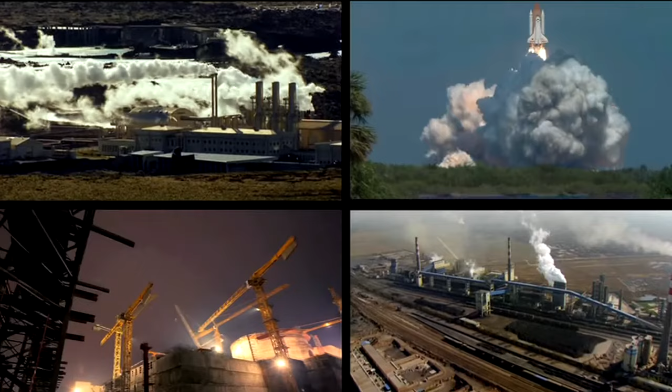We are living in the era of great changes. The power of the human mind has made our life more comfortable, shortened distances, and opened up new horizons. But for the global industry, our era is the time of great challenges.

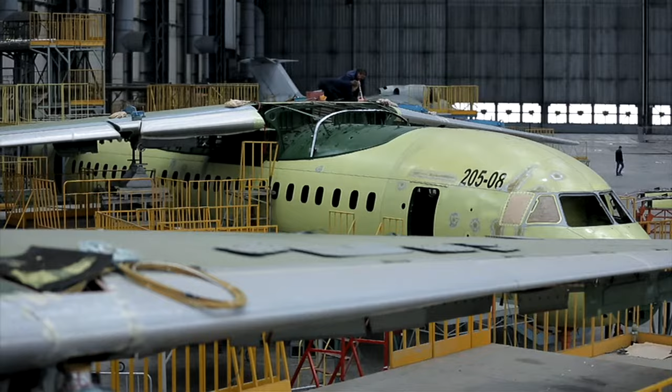The airplane is the fastest and most expensive means of transport. Since the advent of the first aircraft, designers have been working to reduce its weight and make it more reliable, and so reduce the cost of each kilogram carried by air.

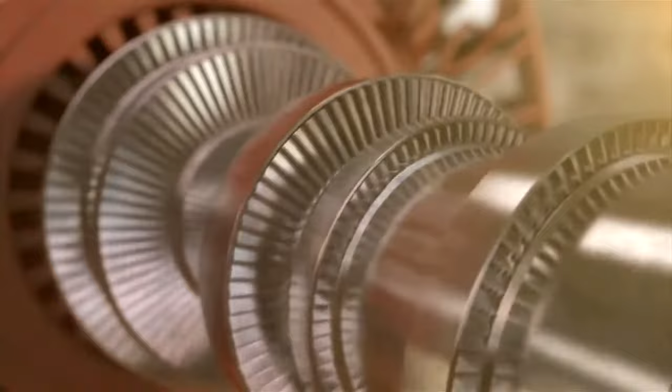Nuclear power is the most promising and cheapest way of generating electric power. However, each structural element of a nuclear reactor operates under conditions of overload and ultra-high temperatures. Extension of their service life and enhancement of their reliability and safety are the main tasks for engineers.

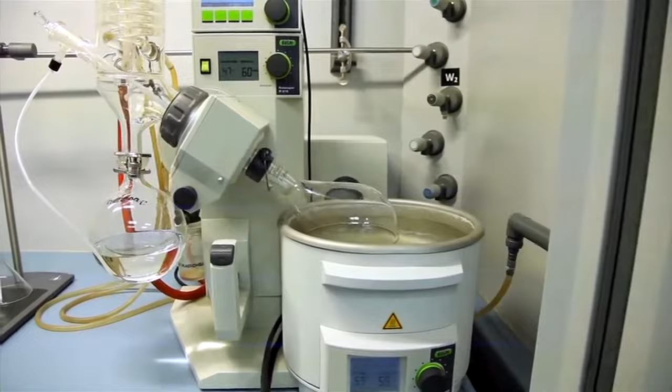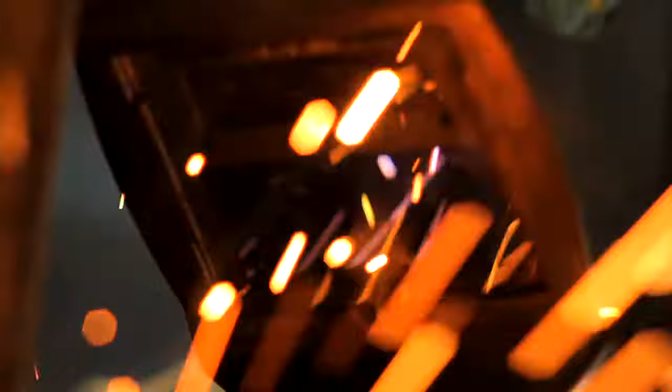Thus, technical progress is impossible without new materials and their new unique properties: ultra-lightness, ultra-strength, and heat resistance. However, the introduction of new materials requires new progressive techniques of their connection. For over 70 years, this field of research has been developed here at the B.E.Paton Research Institute of Electric Welding.

The institute was founded in 1934. It employs 3,500 staff. The B.E.Paton Institute has sold more than 150 licenses to the United States, Germany, Japan, Russia, Sweden, France, China, and other countries worldwide.

Structurally, the institute comprises an experimental design and engineering bureau, pilot production facilities, 3 pilot plants, and more than a dozen engineering centers.

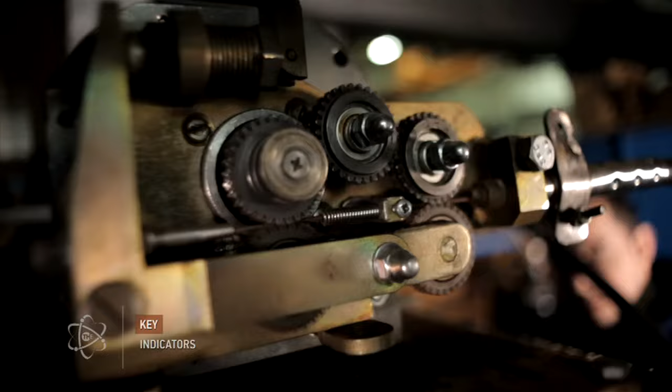The technologies developed by the B.E.Paton Institute have served as prerequisites for successful implementation of many audacious global projects, such as forced gasification across the USSR, the world's most powerful weapon, the Satan ballistic missile, continuous welded rail tracks allowing trains to move at 500 km per hour, semi-automatic underwater welding, and welding in the outer space.

Notably, the B.E.Paton Institute was one of the originators of electron-beam welding, the technology without which nuclear power engineering and modern aircraft, rocket, and engine building industries would be impossible.

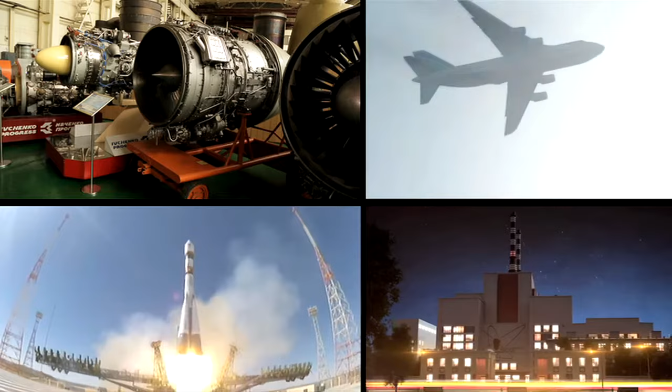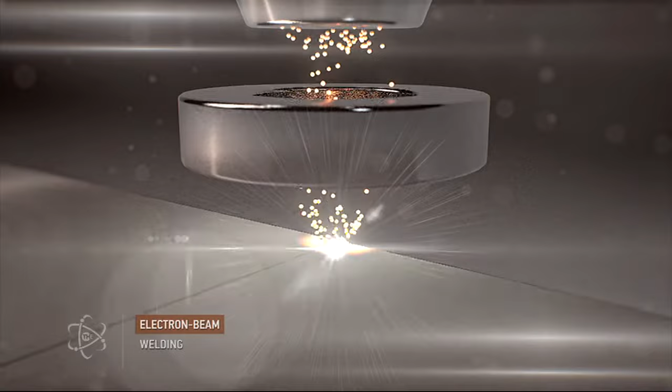How does it work? Electrons are focused into a tight beam and accelerated to ultra-high speeds. When they hit the surface, their kinetic energy is converted into heat, and so metal is heated to high temperatures. As a result, the weld is characterized by large depth and small width.

Electron-beam welding ensures reliable connection of refractory, chemically active, and dissimilar steels, as well as high-strength aluminum and titanium-based alloys. Unlike arc welding, this method reduces energy consumption by 10 to 15 times, and the fusion area by 25 times.

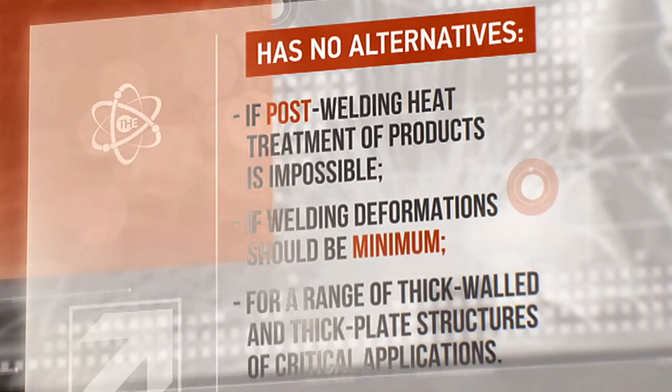Electron-beam welding has no alternative if post-welding heat treatment of products is impossible, if welding deformations should be minimal, and for a range of thick-walled and thick-plate structures of critical applications. Making the most of its powerful scientific potential, the B.E.Paton Institute develops unique technologies with due regard for individual customers' requirements. Here are just a few examples.

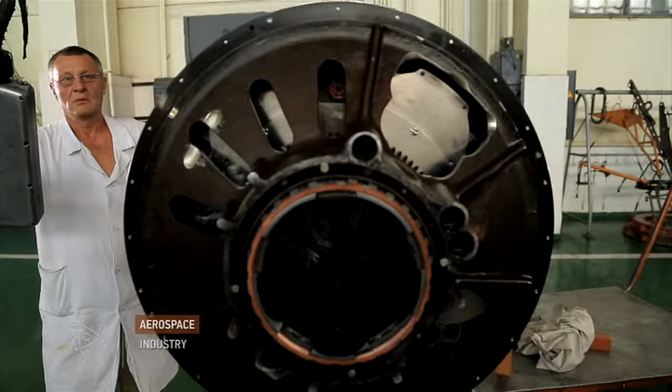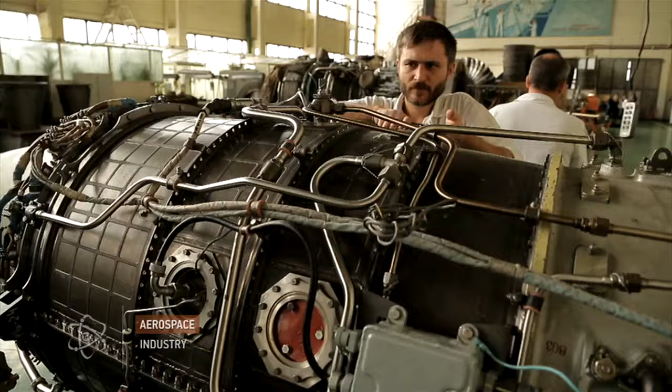The engine is the heart of an aircraft. The manufacturers that offer more economical and more powerful engines win the market. The hotter the gas fed to the turbine, the better these parameters. For this reason, joint connections have to withstand extremely high temperatures.

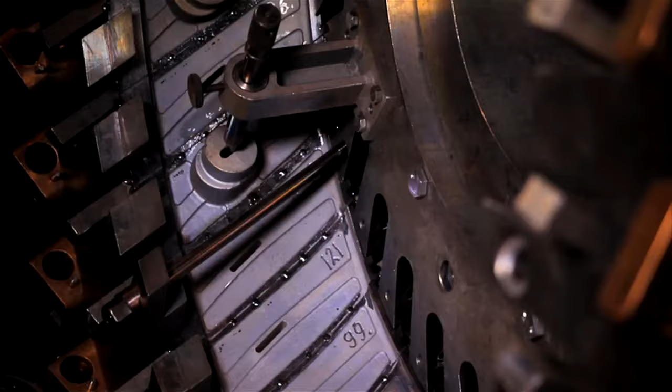In 2014, B.E.Paton scientists developed a method to weld the outer part of the casing of the aircraft engine's front intermediate pressure compressor. The customer was Motor Sich, one of the world's leading engine manufacturers. The material was VT5L titanium alloy. Previously, the unit had a cast design, which resulted in high production costs and unstable quality.

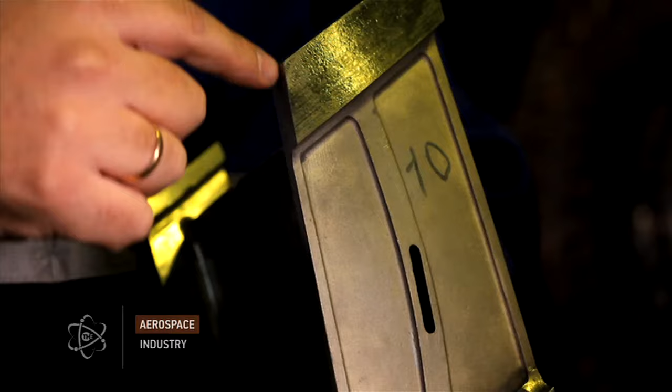The developers faced 2 problems while making the welded structure. First, geometrically, the joint was a variable cross-section. Second, the through penetration weld had to be 5 to 25 mm thick and made in one run. Scientists of the B.E.Paton Institute found effective solutions to both problems.

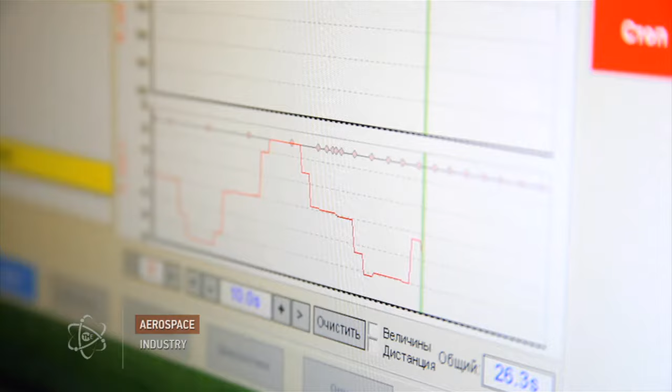The process is entirely controlled by special software, and the welding program excludes an operator. The strength factor of joints conforms to the strength factor of the metal body.

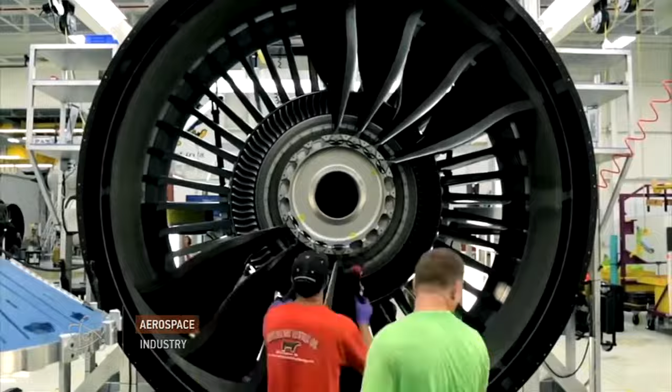The main part of an aircraft engine turbine, the rotating blade, bears the brunt of the heat. The engine's operation fully depends on its strength. And this is about flight safety.

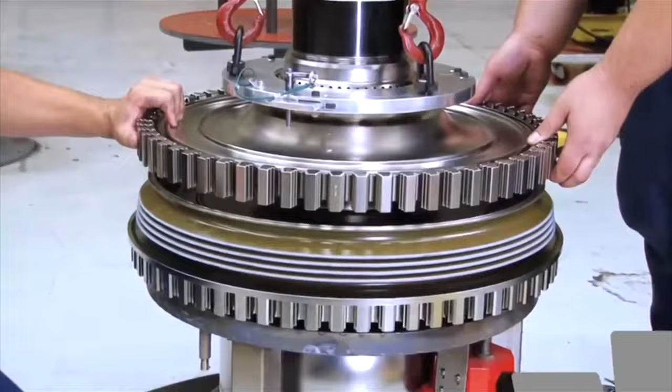The B.E.Paton Institute has developed a method to restore damaged blades by welding in triangular inserts. The customer was Motor Sich, and the material was VT titanium alloy. One rotating blade costs tens of thousands of euros, and an engine has a multitude of them.

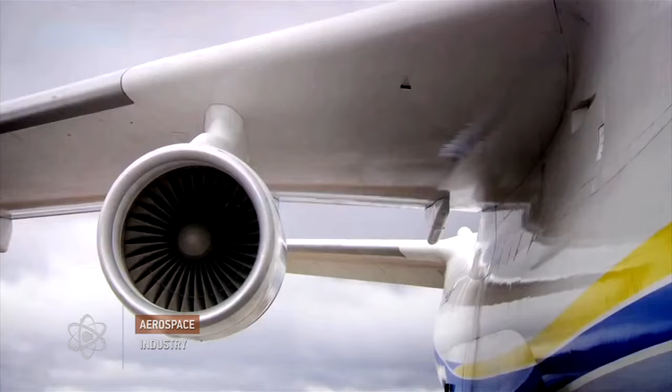Our technology provides for the service life extension of this part by several times. The economic effect is obvious. Currently, a pilot batch of restored blades is undergoing strength tests. After their completion, the method will be applied at the customer's production facilities.

We have developed an electron-beam welding method for high-pressure spherical balloons of spacecraft. The customer is the Space Agency of the Republic of India, and the material is VT6 titanium alloy.

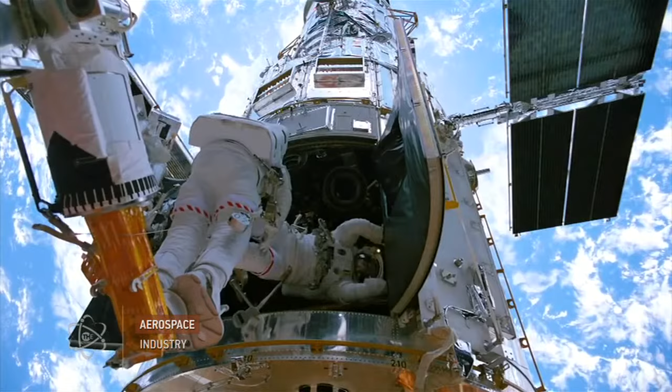As compared with argon arc welding, this method minimizes welding deformations, post-welding mechanical treatment, and weld spatter inside a spherical balloon. Experts believe that the future of the aerospace industry belongs to magnesium alloys, one of the lightest and at the same time one of the most durable types of materials.

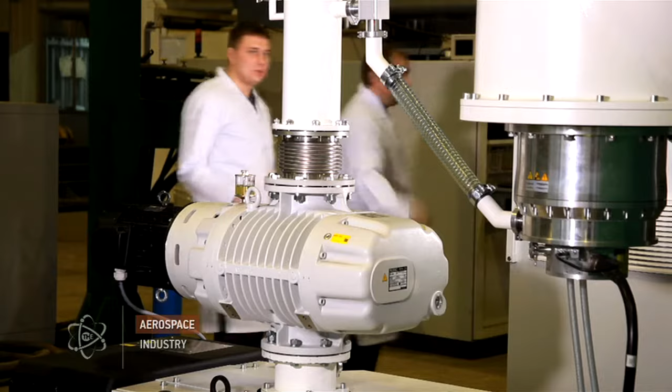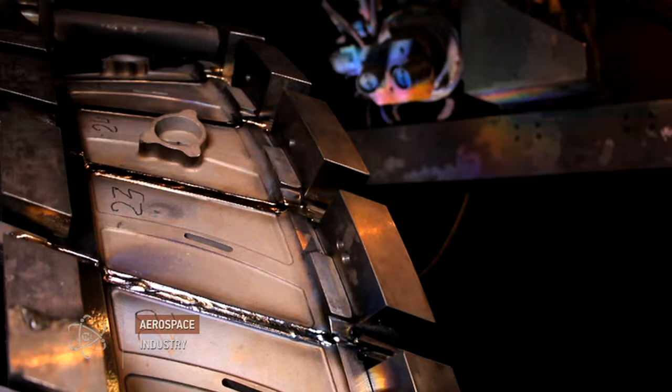However, the introduction of magnesium alloys on a large scale has so far been hindered by imperfect connection techniques. The B.E. Paton Institute has developed a hybrid technique for connecting this material. The first stage is friction welding, and the next stage is electron-beam welding. Thanks to pre-treatment of welded edges by friction stir, cracks and other defects are avoided, and welded joints become almost twice as strong, with their plasticity and impact resistance enhanced as well. This technology has been developed for rehabilitation of intermediate casings of aircraft engines by welding in a 6 mm thick rectangular insert in the damaged area.

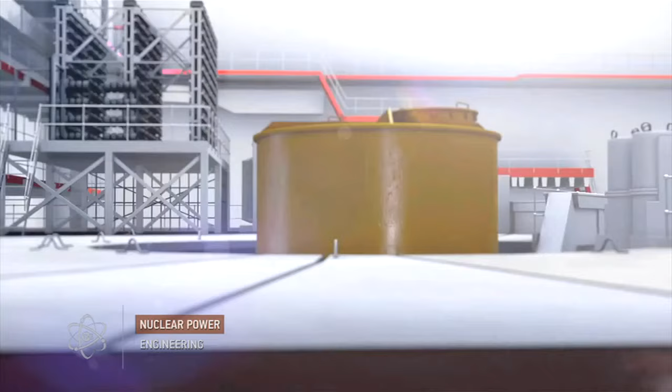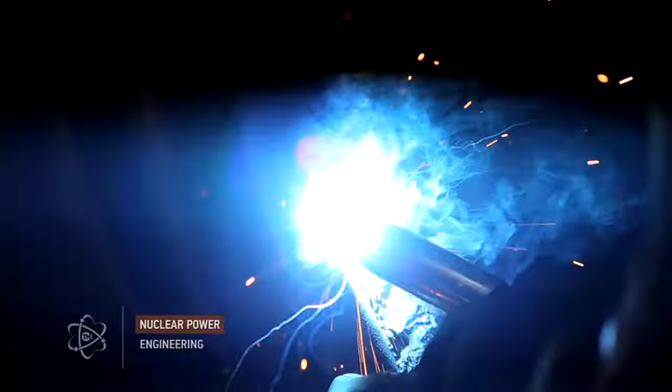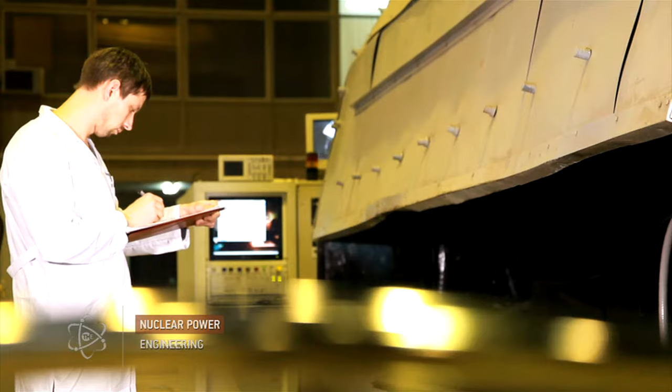One of the most challenging aspects of the global energy industry is reliable connection of thick-walled structures like walls of a nuclear reactor. At present, walls thicker than 40 mm are connected by a multi-layer weld, which sometimes takes up to 100 runs. This technique requires multi-step preparation and significantly increases the likelihood of weld defects, which subsequently affects quality and performance. The B.E. Paton Institute has developed a new technique to solve this problem.

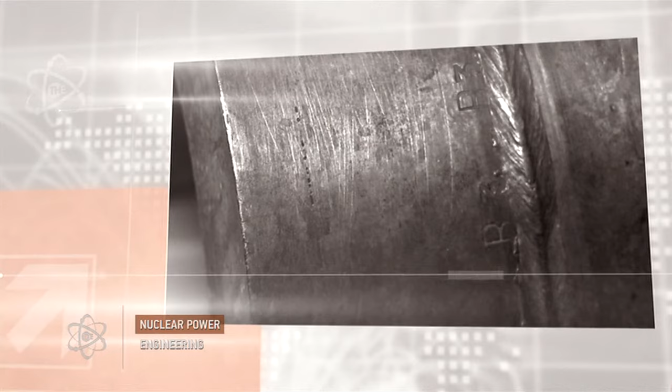The customer is the Russian public holding company Izhorsky Zavody, the only CIS manufacturer of equipment for reactors of the so-termed nuclear island, as well as for reactors of the petrochemical industry. The material is chrome molybdenum steels. Owing to 90 kilowatt beam power, materials up to 200 mm thick can be welded together in one run. This is a unique achievement, yet unsurpassed by any manufacturer of welding equipment. Comprehensive studies have confirmed that the weld is as strong as the metal body.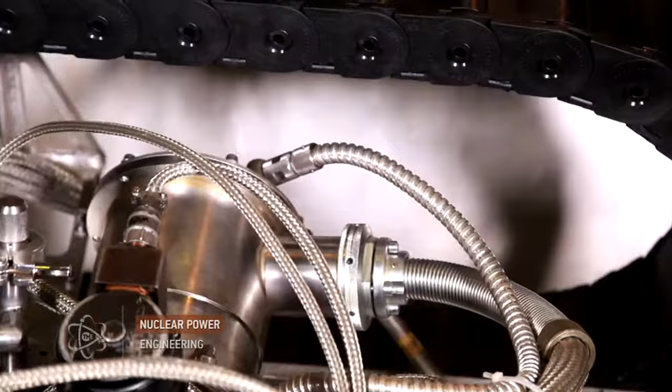Using this method, the customer is able to skip several preparatory stages and cut the time of welding by several times, thus significantly improving weld joint quality and increasing productivity.

A heat exchange unit is the key element of a nuclear reactor. Because of colossal pressure in the tubes reaching 10 megapascals, water does not boil at 270 degrees centigrade. High radiation adds to the most extreme wear conditions.

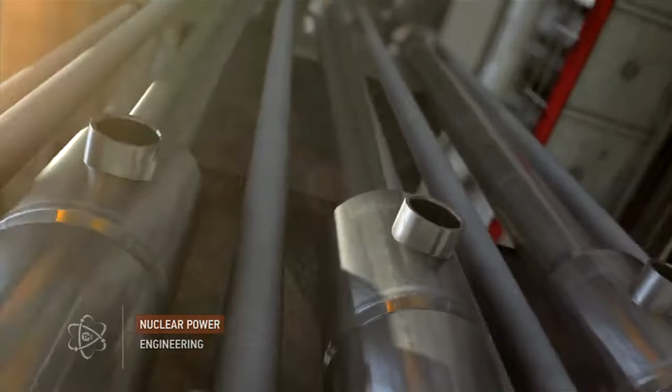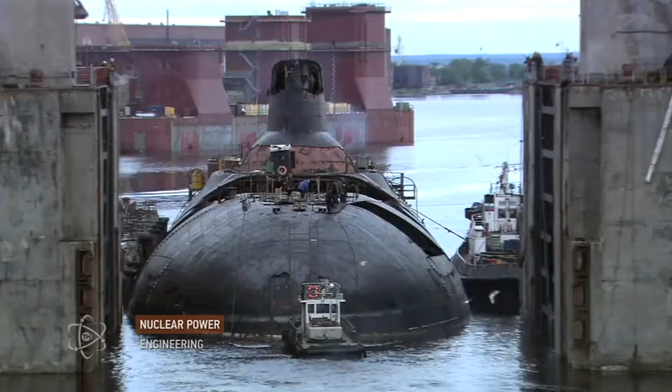The B.E. Paton Institute has developed an electron-beam welding method to connect the heat exchanger walls with multiple tubes. Unlike traditional argon arc welding, this method doubles the penetration depth and the unit's service life. The welding proceeds automatically according to a preset program. This method has been successfully applied in the construction of nuclear-powered vessels.

The energy crisis forces humankind to search for and develop new oil and gas fields, and here the main task for engineers is to extend the service life of drill bits. They consist of 3 vertical case segments made from medium alloy high-strength steel.

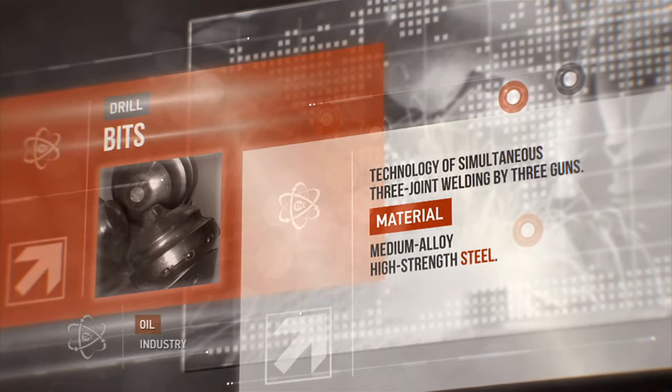The traditional method of successive welds did not allow for the regular geometric shape of the drilling bit. As a result, its service life and performance characteristics reduced. The B.E. Paton Institute has developed a method of simultaneous 3-joint welding by 3 guns. As a result, output capacity has increased to 5 items per hour.

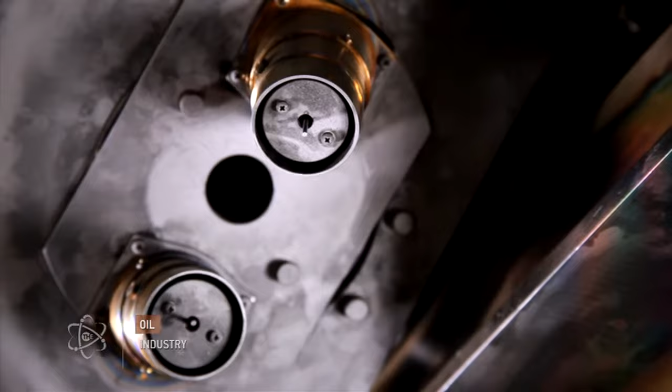Using this method, the customers have not only increased their outputs by several times, but have also increased considerably the end product's economic efficiency. This technology has been successfully applied at Chinese factories for more than 5 years, allowing them to put out products with higher added value.

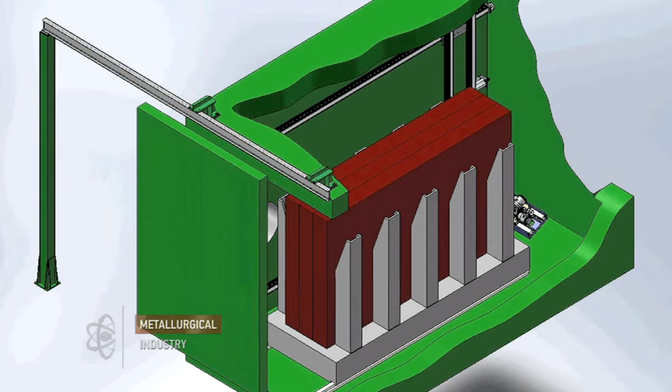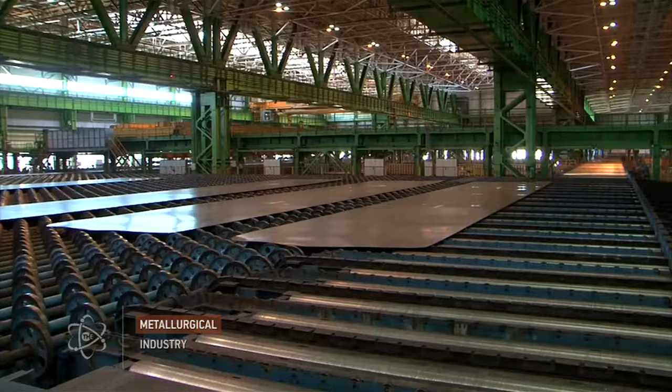Scientists of the B.E. Paton Institute have developed a slab connection method for the metallurgical industry. The customers, a pool of integrated iron and steel works in China, needed to increase the thickness of their slabs from 20 to 40 millimeters. However, they were limited by the rolling mill's capacity. Traditional welding methods did not allow them to obtain homogeneous material because of cavities with air forming inside.

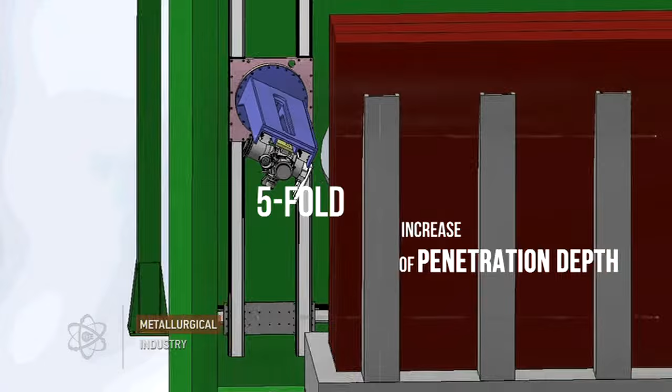Electron-beam welding takes place in vacuum. At the same time, penetration is 5 times deeper than in arc welding. This ensures homogeneity of metal during subsequent rolling and the output capacity of 1 item per hour.

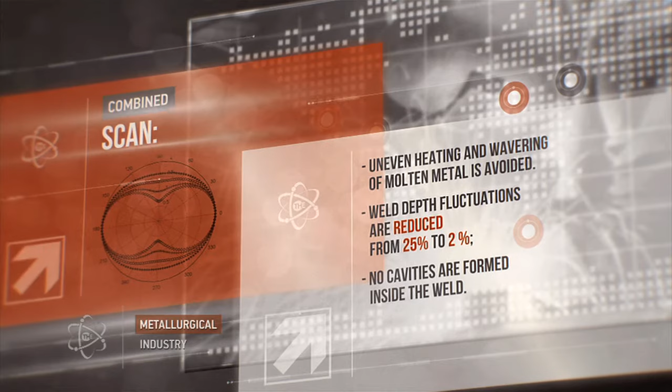The B.E. Paton Institute successfully applies combined electron beam scanning, wave, circular, etc. This helps to avoid uneven heating and ripple of molten metal. As a result, weld depth fluctuations are reduced from 25% to 2%, and welds have no cavities.

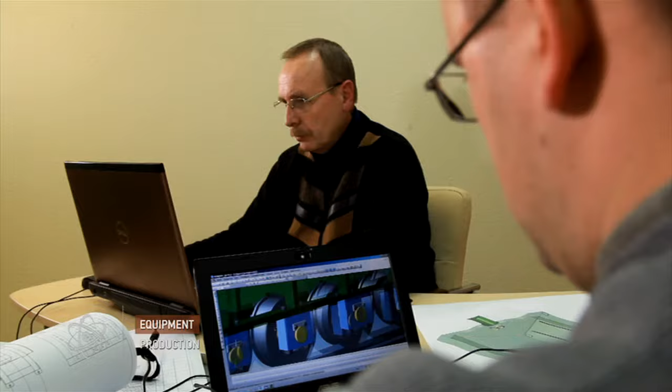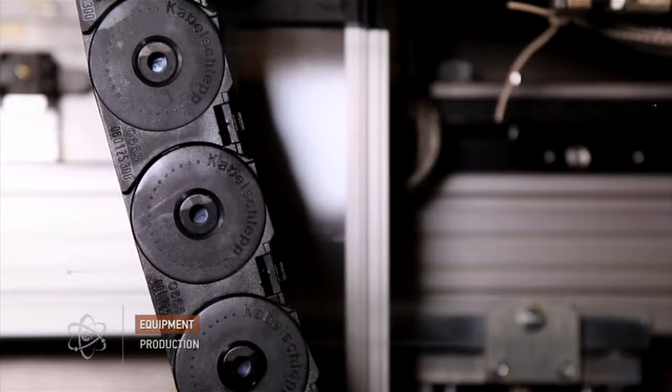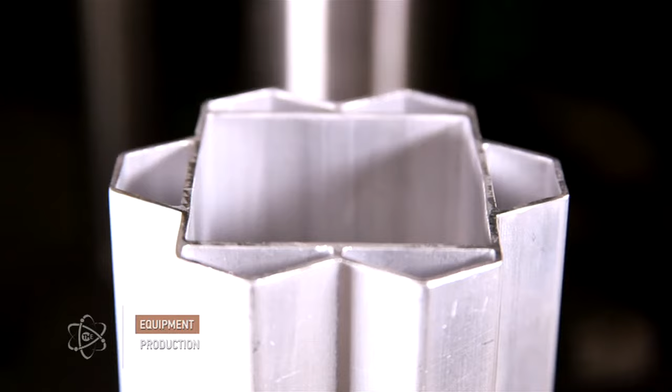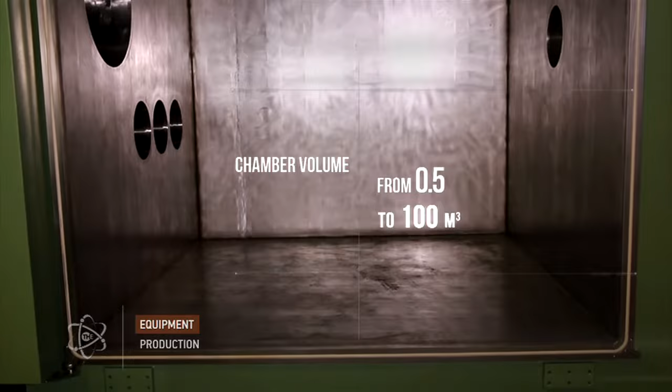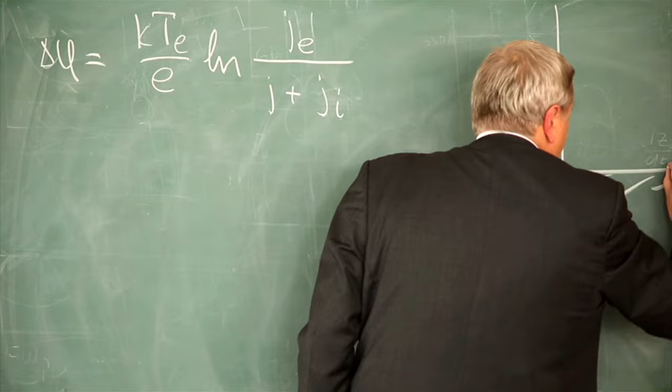So what's the secret of the B.E. Paton team? It is a unique scientific school, high-tech production facilities, focus on global projects, persistence, and unprecedented revolutionism.